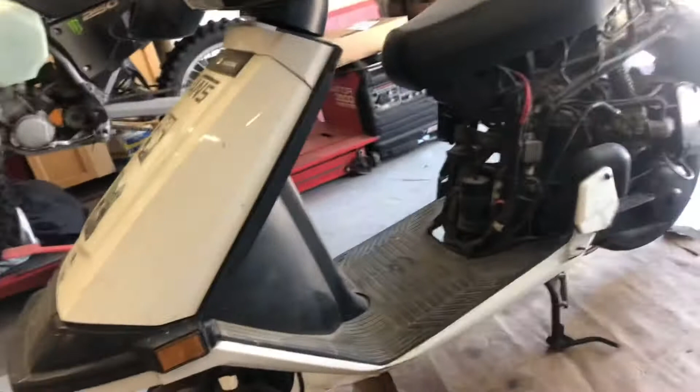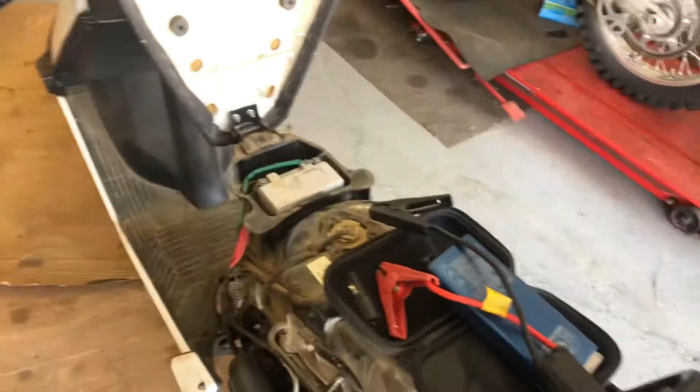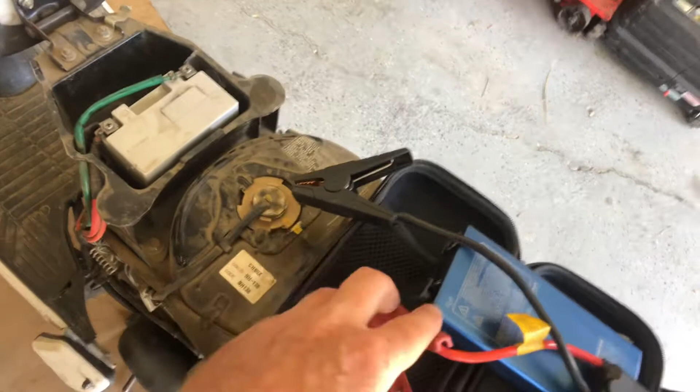We're gonna see if we can get her started first. I was gonna use the little jumper pack here. Well, actually, I have a battery, one that I removed from my Husqvarna that still holds a charge. It's not the best battery. Tell you what, we'll just swap that battery in. We'll come right back because this thing is kind of a pain. I was trying to do this a little bit before the video and these are a little too big to fit in here. We'll swap batteries, we'll be right back.

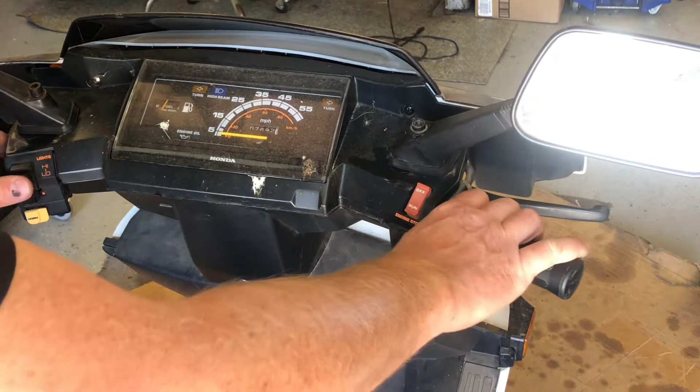Batteries in, let's see what we got here. All right, horn works. Cranking.

Oh hey, you gotta turn it on to run. Makes a big difference.

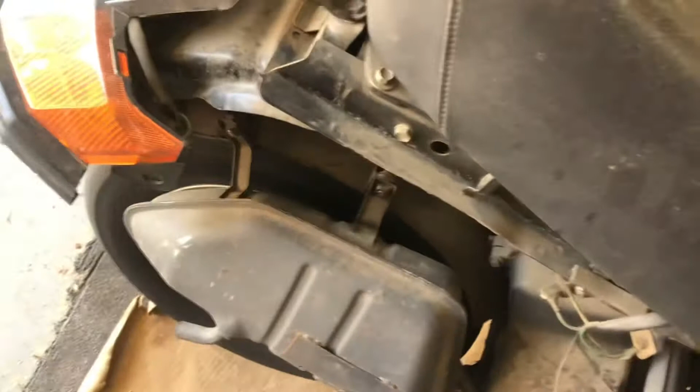Okay, so that was easy enough. We got it started. The back wheel is really spinning up pretty quickly here. Yeah, something I don't think is right with that clutch because it's just killing the engine. That wheel shouldn't be spinning like that.

But it looks like we have a tail light, we have a headlight, we got the horn.

All right, I'm probably gonna take it up and down the driveway. Well, maybe let's see if I can take you all with me. We can ride a scooter with one hand. Let's check to make sure we have no loose bolts, and we'll do a little test run on it to see how she rides. Okay, I'm just gonna accelerate us into the garage here.

Now that the wheel's on the ground, it's got kind of a clattery knocking sound in the back there, and when I accelerate, it's making squeaking. I don't know how well you can hear that. And it's like really vibraty feeling. It's definitely not right.

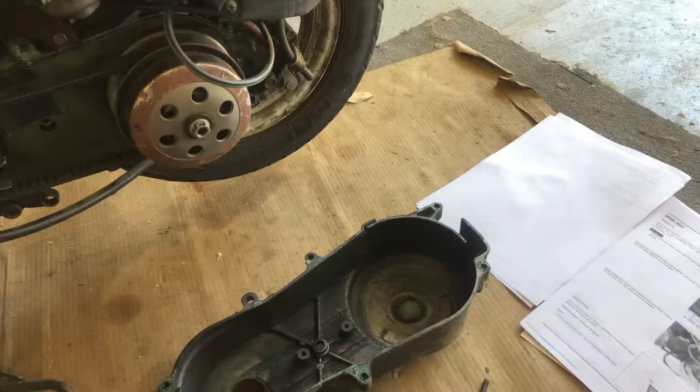So we'll get her on the stand and we'll pull that belt cover off and take a look at it and see if we can find anything obviously incorrect. The drive belt and the clutch cover comes off pretty easy. All the bolts are fairly obvious. There's only one that's kind of tricky, and that's this engine cover piece here. Goes straight in there. All the rest are really pretty obvious.

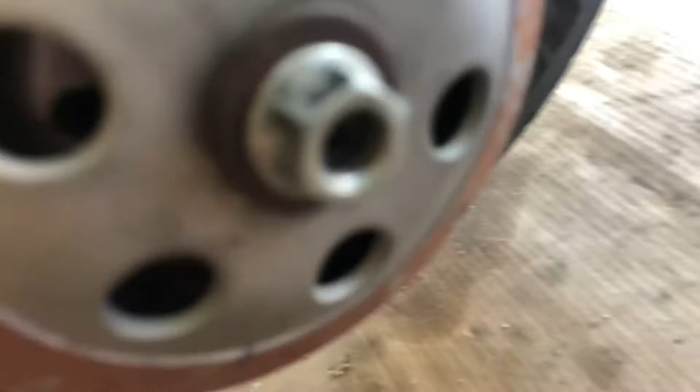Now, when I took this thing off, this is the first thing that stands out to me, and I don't know if that's correct or not. I don't know how well you can see that, but that bolt there is barely holding on. So I'm not sure if that's correct, like I said, or not.

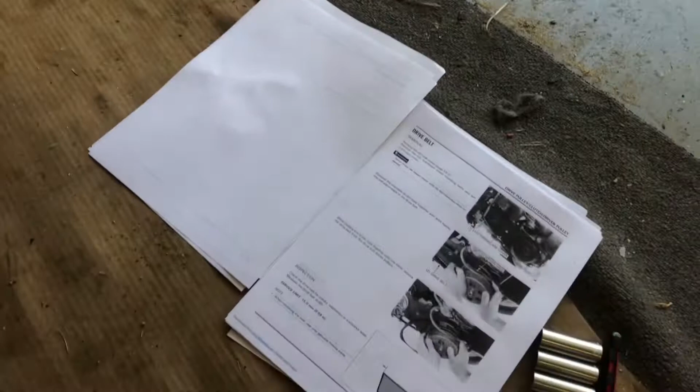I do have the printout of a manual here, so we're going to go through this whole thing and check it out. It says I should be able to remove the drive belt by squeezing this clutch apart enough. We'll see if I can get that off, and then we'll start removing that.

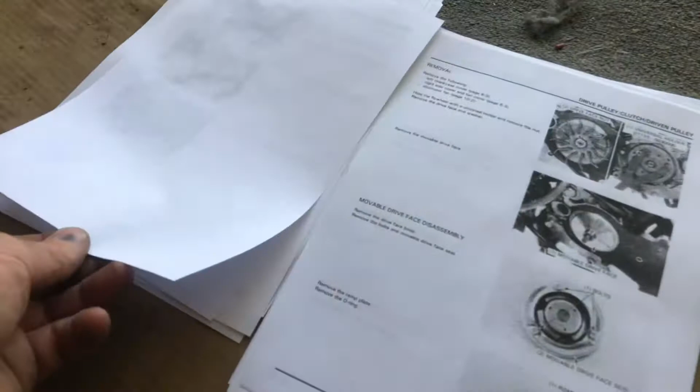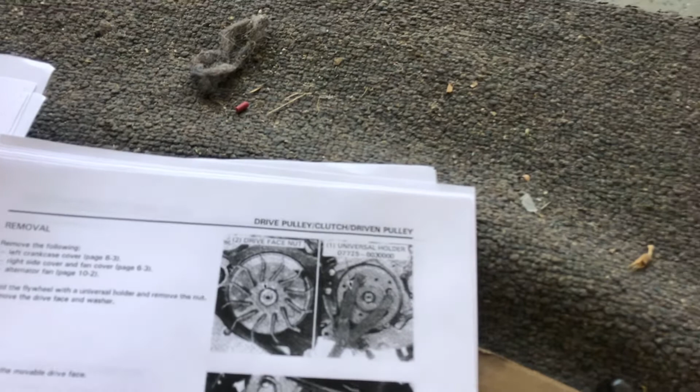I'll check the clutch here. All right. No, this is saying that I have to have some kind of a special tool to remove this, but let's get this belt off and we'll remove this rear.

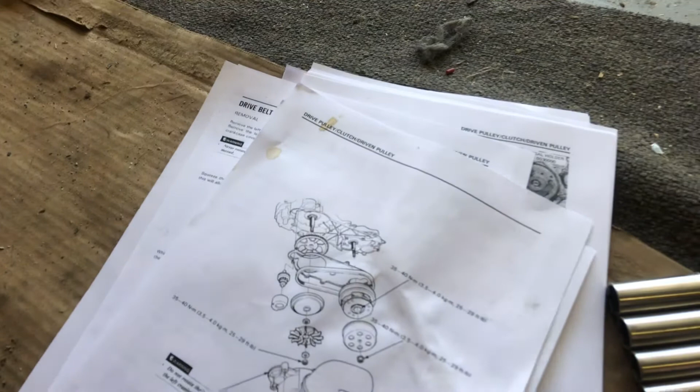I don't want to say the wrong nomenclature. Let's go back here. This doesn't even say what the nomenclature is, because I know one's a clutch and one's a variator, something like that. So, or a driven pulley. Yeah, drive pulley, driven pulley.

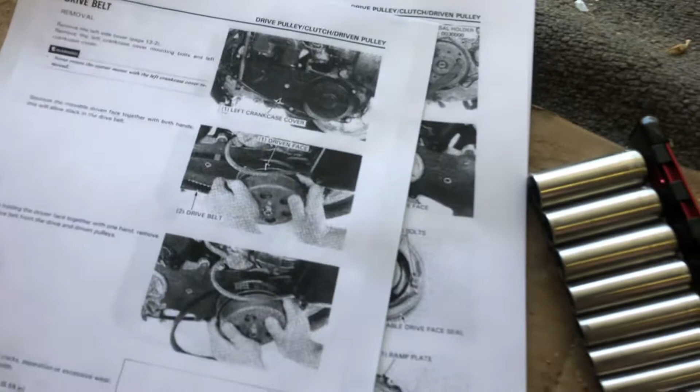So actually we'll go to that first. Let's see what we got here. It says it's on page 8.8. Okay, so I'm supposed to use a universal holder and then remove that nut off of there.

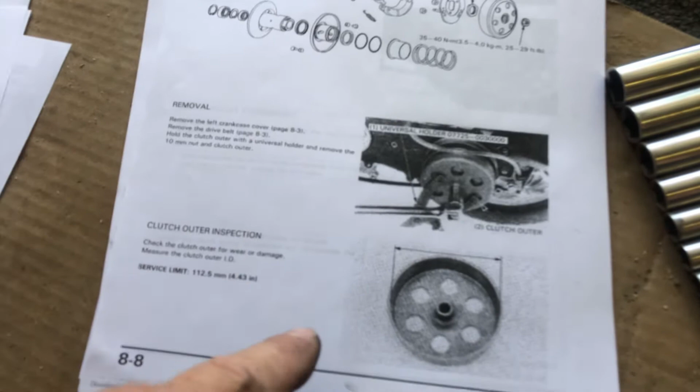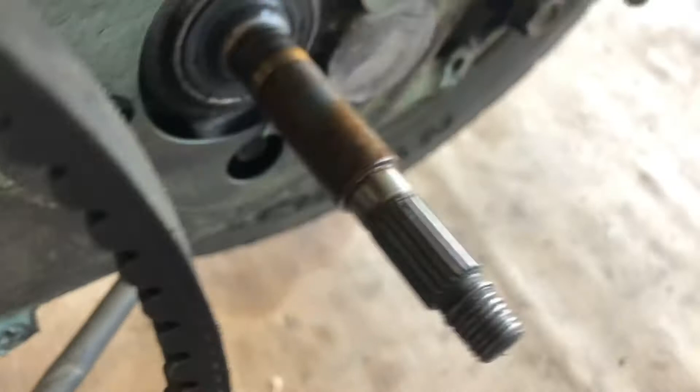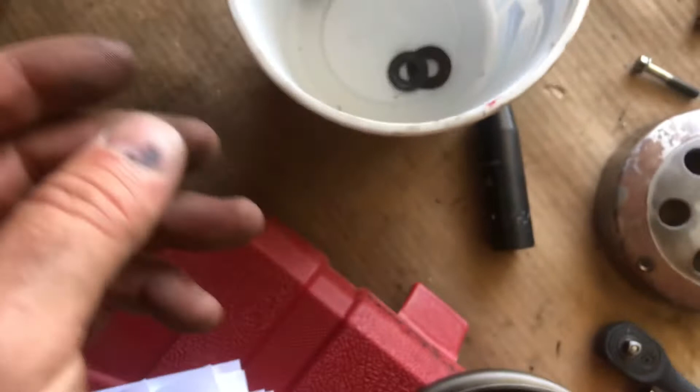Well, I used my trusty impact wrench here to remove this, and hopefully let's get on here and see how well you can see this. There's some, looks like stripped out threads here. I don't know how good this nut is. I'm going to take a look and see if I have anything in my parts stash, but everything I'm seeing here does not show a washer on this.

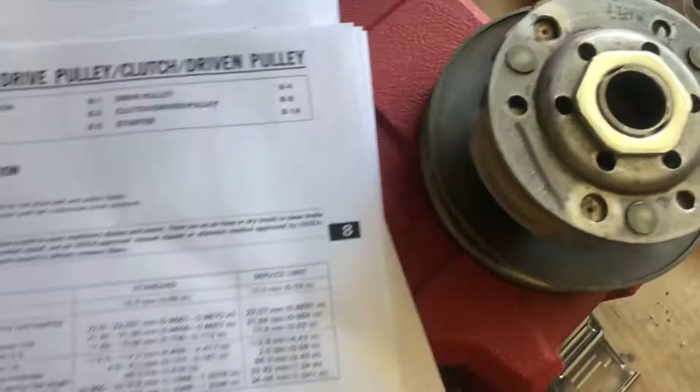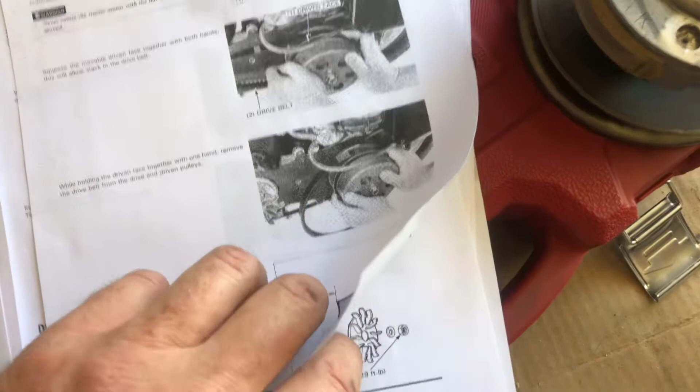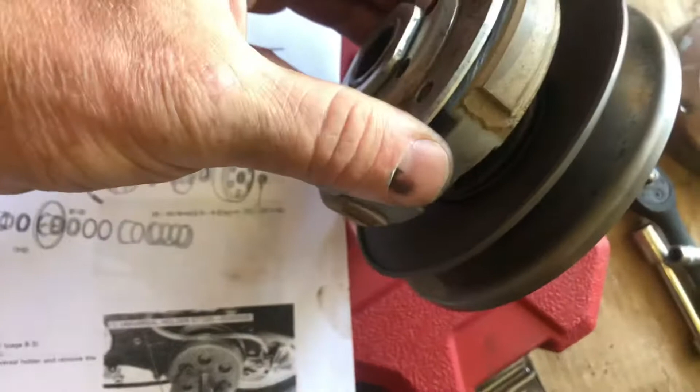Unfortunately, I don't really have the greatest parts breakdown, just that, but I'm going to open up the internet and see if I can find some parts breakdown online. But this, once again, is not showing a washer, just the nut. This clutch appears to be okay. Everything seems to work smoothly on this. But if that wasn't on there correctly, that could definitely be a problem.

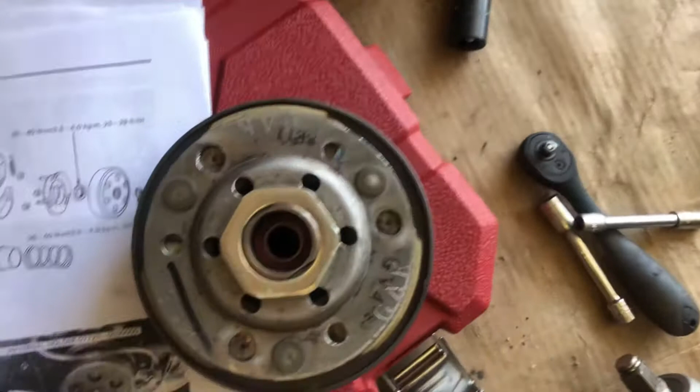I'm going to take a look at that online, see if we can figure that out, and then while we're at it, we'll see if we can't get this rear driven pulley off of here and see if we can find any issues with that as well.

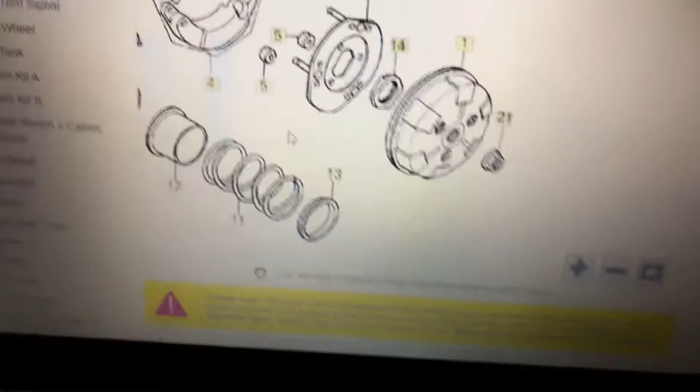Alright, I'm on one of my sites that I like to use to order OEM parts, and this is definitely not showing a washer. So what I'm going to do is I'm going to go back out there. I'm going to try to get a different nut thread on there. If that doesn't work, then I'm going to run a die over that thing from a tap and die set to clean up the threads, and we'll go from there.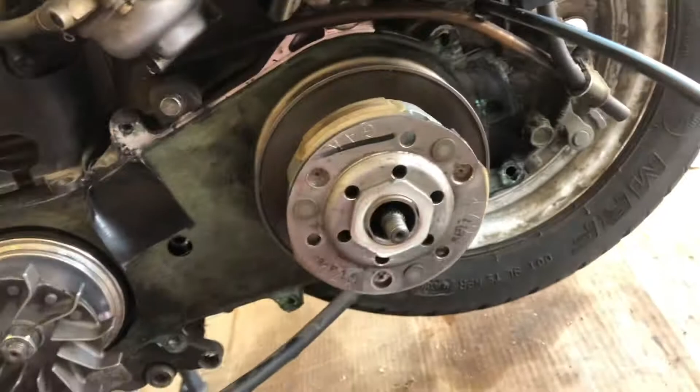Alright, I cleaned the threads up here, and I also cleaned the threads up on the nut. And as you can see, now we go all the way flush. So that's one problem, hopefully solved. Everything here looks okay on my visual inspection, so now we're going to remove this front one and take a look at this, and I think I may be able to just zip that off with my impact wrench.

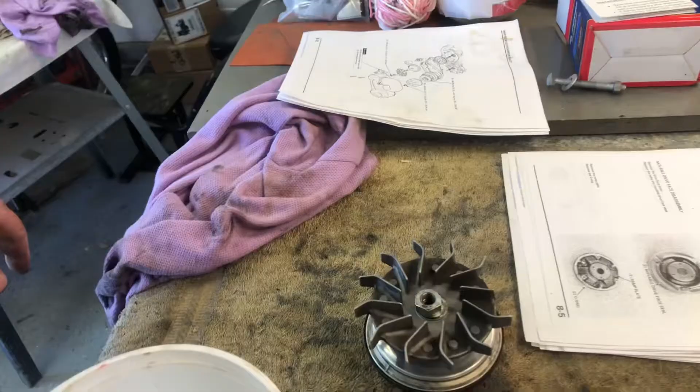Okay, this thing came off pretty easily with the impact. So the nut, washer, what are they calling this one here? The drive face. And then this is the movable drive face. And we'll take that apart and take a look inside of there.

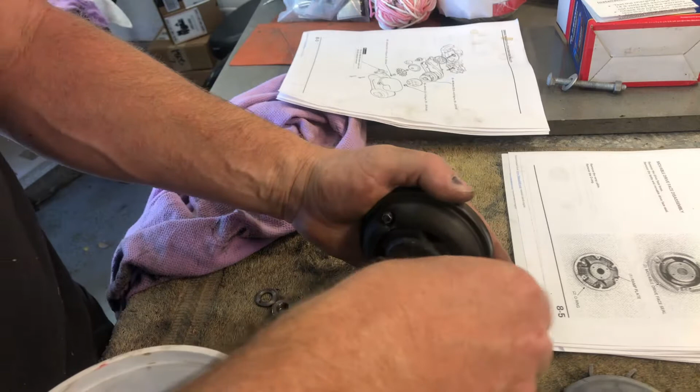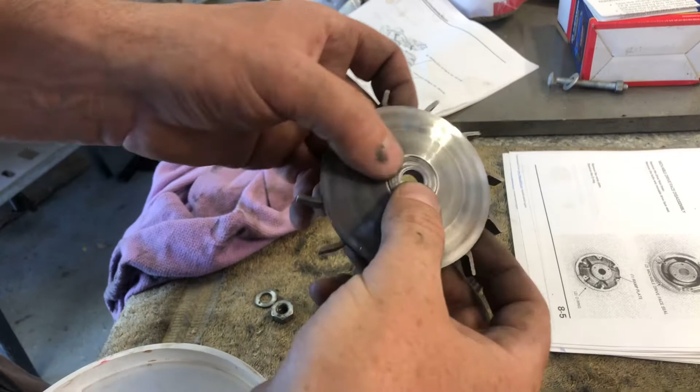Now, one thing I noticed taking this off is, according to our manual, there's supposed to be a washer inside of there between here and there. This washer that was on the rear drive pulley fits perfectly in there. So I'm thinking that that belongs in there. We'll put that in when we put it back together.

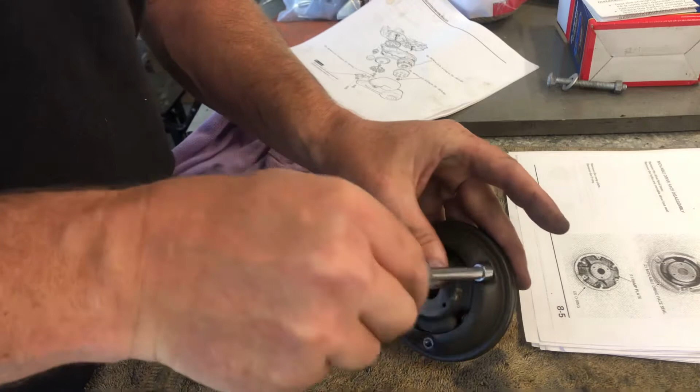We'll take a look in here. This is where your rollers and your ramp is. I think that my buddy told me he had this apart as well. And who knows, maybe when he took it all apart, he lost track of where those washers and stuff went. That's a little bit on the dry side. We'll have to look and see if that's supposed to be lubricated or not. All right.

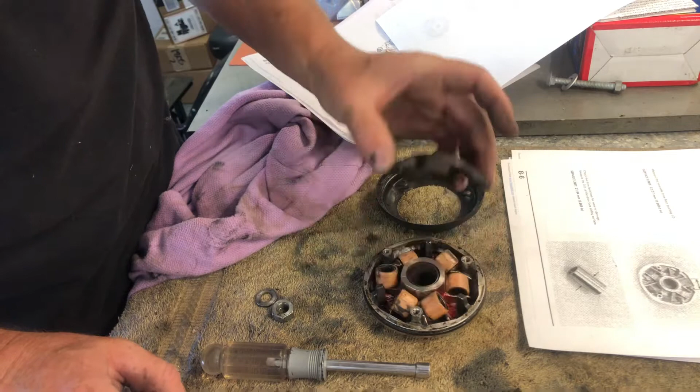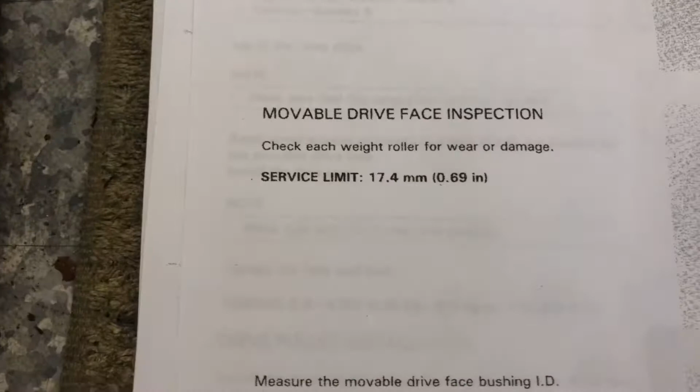Our rollers are kind of misplaced in there a little bit, but other than that, everything looks okay. Let's see, and these are supposed to be 17.4... well that's for the check, each weight roller for wear damage, 17.4 millimeters, so we can measure these, clean them up.

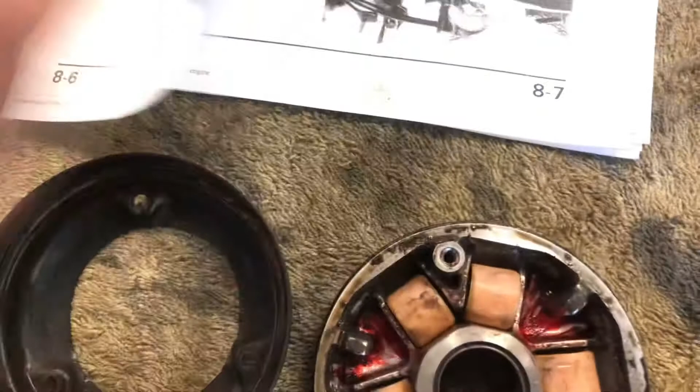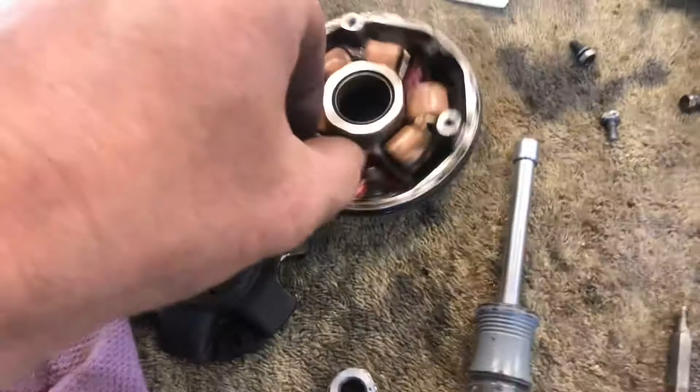And then it says we're supposed to put grease to the inside evenly. So we'll clean everything up. We'll grease this up. It looks like there's grease in this area, but not in this area. Let me get that all cleaned up and we'll come back.

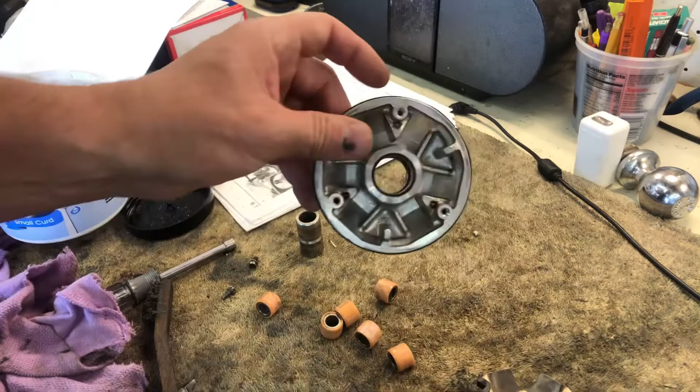I got it all cleaned up. I used a little bit of old gasoline, cleaned it all out of there. Now, the manual asks for a specified type of grease, and I just don't have that. But, you know, we're going to put this thing together. I'm sure someone's going to get upset at me, but we're going to use some Maxima waterproof grease here.

We're going to just put a little bit in each one of these ramp faces here. And then we'll put the rollers in there. It says I'm supposed to use about an ounce of grease. So I don't know how I'm supposed to measure that, but we'll get it in there. We'll put that all together.

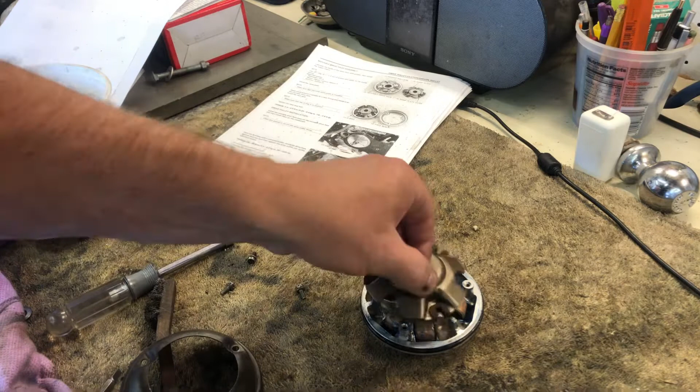Okay, she's all back in there. Got the rollers in. Drop this, what do they call this thing here? The ramp plate guide in there. And then we'll put this cover on the back. There is a torque value for these little bolts. This is 2.9 foot-pounds, so make sure you're doing that right here.

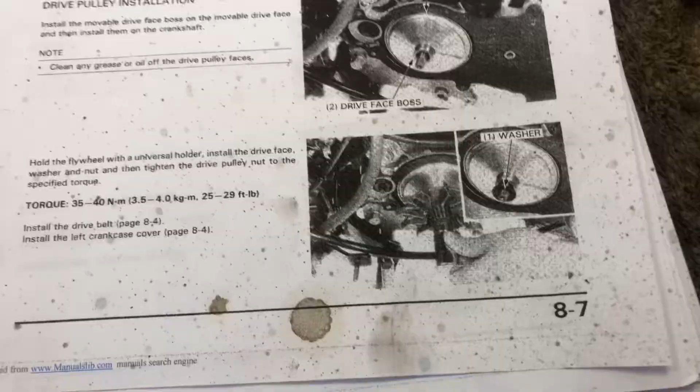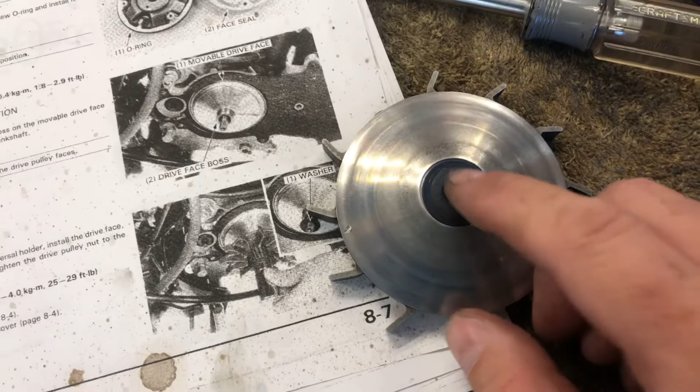Right here in this step, it specifically shows that washer. Like I said, I believe it has to be that washer there that was on the rear driven pulley. So we'll put that on. And of course, we're going to torque it properly.

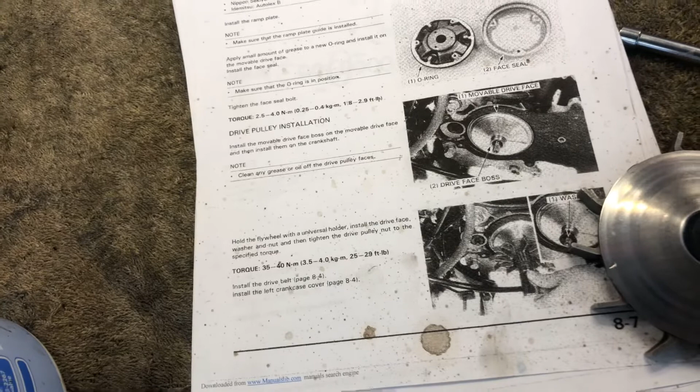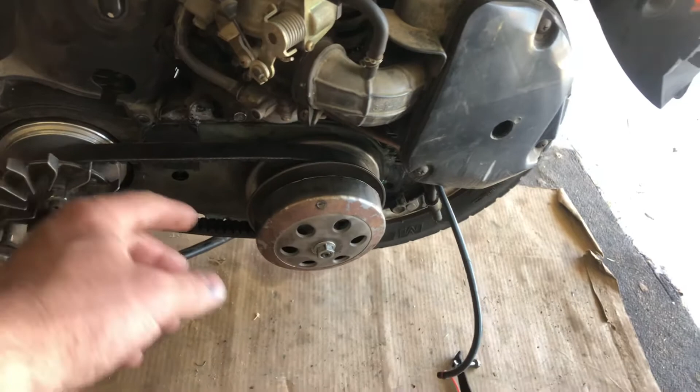And we'll get back to putting the belt and the rear driven pulley on. I guess I should have shown how I put the belt on here, but all I did is slip it over the front drive pulley, then squeeze the rear. You can just squeeze that open, put the belt around that, and then push this over onto the shaft.

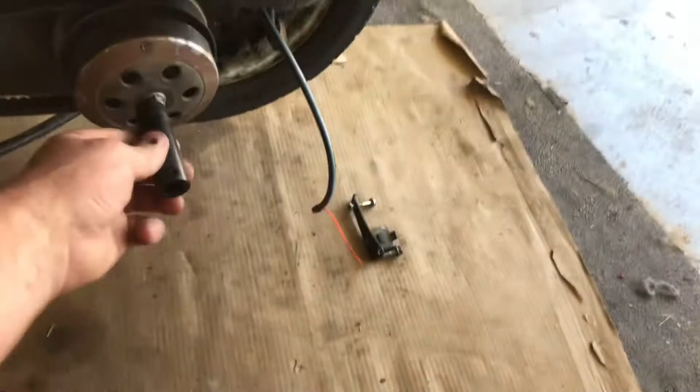Now we will torque this one down here and put the cover on and see if that solves our problem. I got 80 cc's of Pure Fury strapped between my legs here.

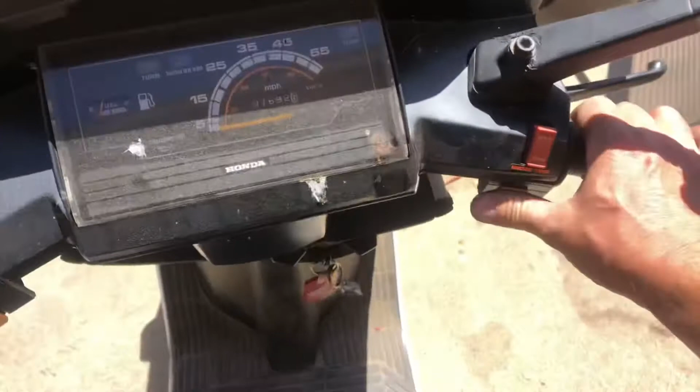Let's see how she feels now. It's not making any noises, and it's not jumping around. I'd say it feels very normal. Our idle is a little bit high, but that might just be because the choke is on, or I might have turned the idle up. I think we've got her. I think we've solved the problem.

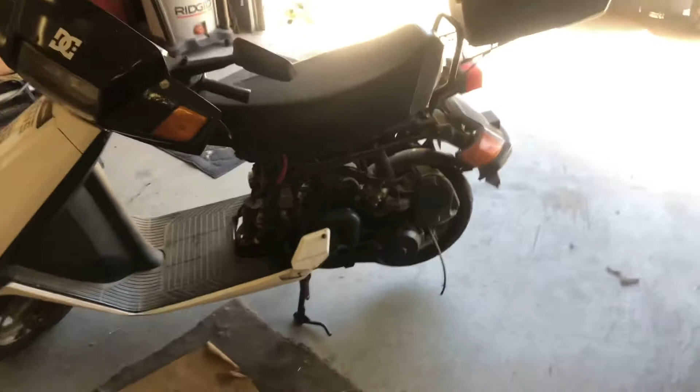Yeah, it's definitely better. All right, now she seems to be driving pretty good. I just took it up and down the street a little bit. Seems to be working just fine.

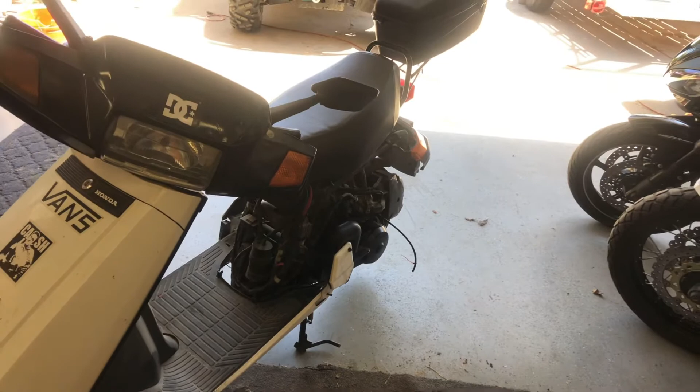When my buddy dropped it off, I was a little disappointed in the condition of it. But then, out of the back of his vehicle, he gave me all that stuff. So I'm gonna spend a couple minutes, hose it off, give it a real quick scrub, clean off the panels. We'll put it together and see what she looks like all in one piece.

Well, there she is in all her glory in one piece. It looks like everything is here and everything appears to work. The only thing that doesn't work on this scooter is the high beam. My buddy told me this model has a sealed beam headlight, which is really expensive, and he actually cut out the bulb from it and put in a little bulb.

Pretty common. Actually, I did the same thing on that Trail 90 125 project there. So I could dig that out, dig out the bulb he put in there, and see if I could fix the high beam. I think the high beam indicator works. Turn signals work, everything else seems to work.

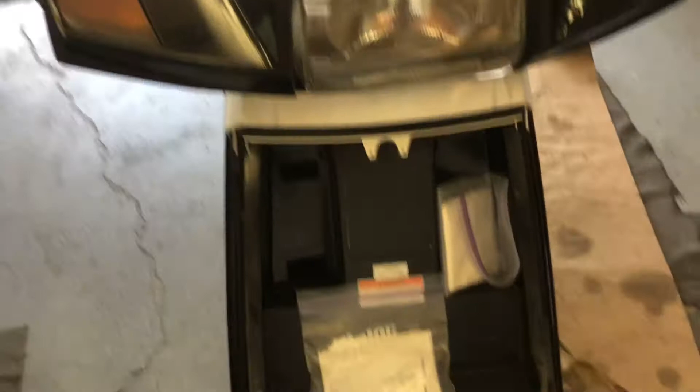And also you have a frunk on these. I didn't show you that. Let me grab the key. Show you the frunk here before we call her a day. The front trunk. There you go. Enough room to put a little bit of something. And I like this, you got a place to put a beer. Not that I would advocate putting a beer in there, but maybe after you get to where you're going, it's a good place to hold your beer.

Okay, that was a lot of fun. We got a scooter going for the grand price of $0. I love it. All right.